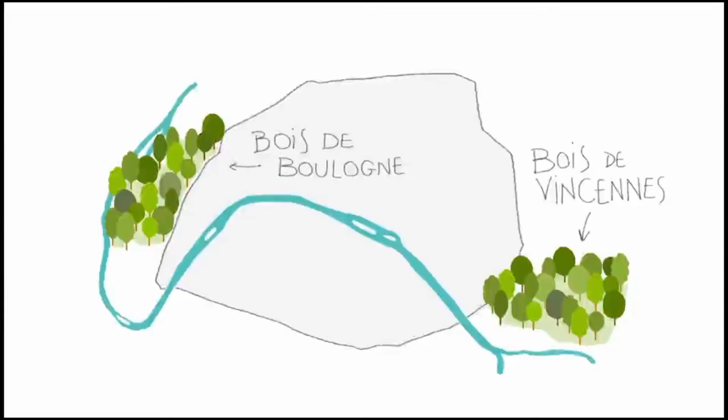The granite columns are still there. Walk through certain districts of Paris, and you will notice them: thick stone pillars, sometimes integrated into building facades, sometimes standing alone in courtyards. They are typically 1 meter in diameter, and they run vertically through multiple stories. Most passers-by assume they are structural elements or ventilation shafts.

They are neither. These are the remnants of a compressed air distribution system that powered factories, workshops, and machinery across Paris for over a century, a pneumatic grid that once rivaled electricity in its reach and sophistication. The Compagnie Parisienne de l'Air Comprimé began operations in 1881, and at its height, the system delivered compressed air through 186 kilometers of underground mains to thousands of subscribers. The infrastructure was not fully decommissioned until 1994, but the physical evidence, the columns, the valve housings, and the receiver tanks, remains embedded in the city's architecture.

It is a fossilized energy network that most people no longer recognize for what it is. The system was not experimental, it was profitable, commercial infrastructure that operated continuously for 113 years, outlasting many technologies that seemed more promising at their introduction. The fact that this history has become essentially invisible within a single generation reveals something fundamental about how technical knowledge persists or disappears, regardless of a technology's actual scale or success during its operational lifetime.

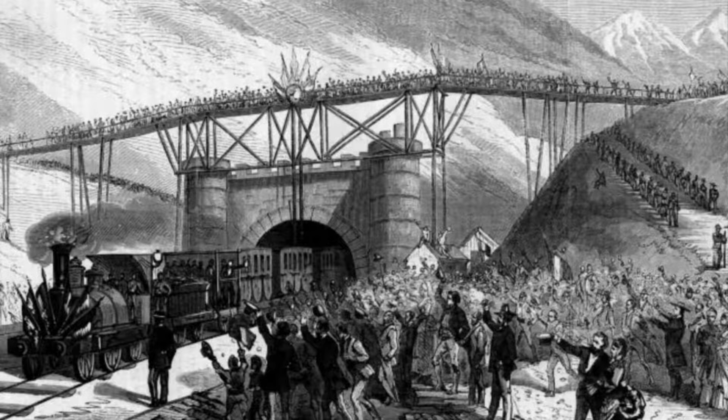The concept was not Parisian in origin. Compressed air as a power transmission medium emerged from mining operations in the Alps during the 1850s. The Mont-Cenis tunnel project connecting France and Italy through 13 kilometers of solid rock required drilling technology beyond what muscle power or steam engines positioned inside the tunnel could provide. Engineers developed water-driven compressors on the surface that forced air through iron pipes to pneumatic drills deep underground. The system worked. Drilling rates increased 7-fold compared to manual methods, and the tunnel was completed in 1871.

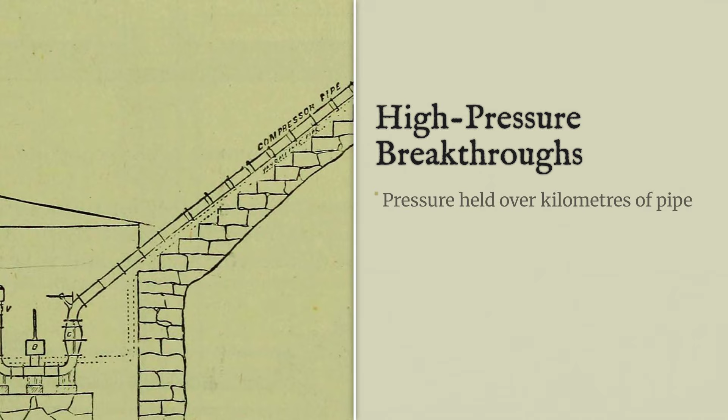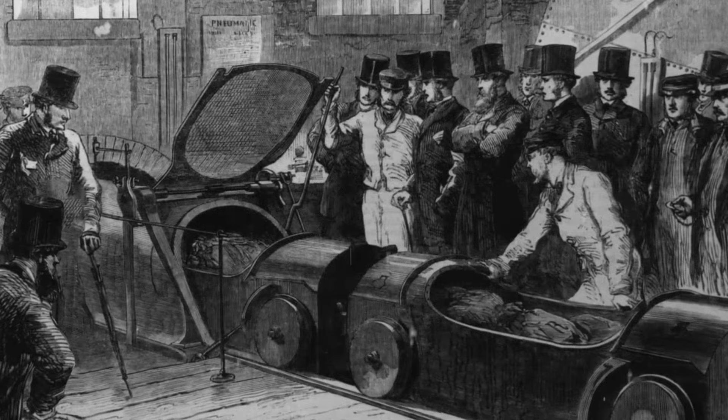What began as a solution to a specific excavation problem revealed a broader principle: compressed air could transmit power over distances and around corners in ways that mechanical shaft systems and even early electrical transmission could not match. The engineering challenges were substantial. They included maintaining pressure over kilometers of pipe, preventing condensation that would freeze tools in winter conditions, and designing valves that could withstand the constant cycling of high-pressure air.

But these challenges were solved through iterative design improvements documented in the technical literature of the period. The Revue Universelle des Mines published detailed accounts of the compressor installations, including specifications for the Sommeiller-Colladon compressors that powered the drilling equipment: water columns driving pistons with 600mm cylinders producing air at 7 atmospheres and capable of supplying 12 pneumatic drills simultaneously operating at depths up to 1,000 meters from the compressor station.

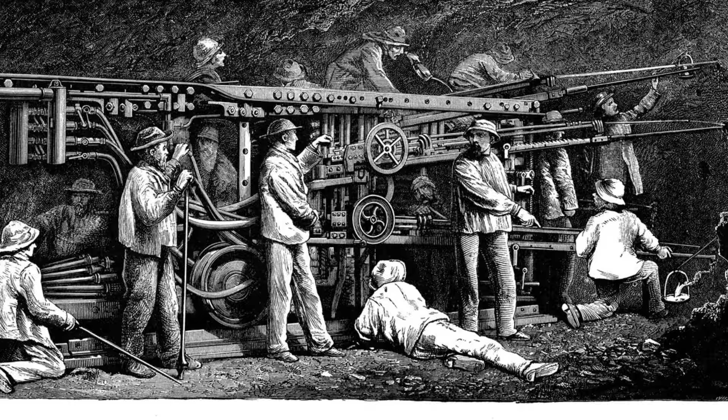Victor Popp saw the urban application. An engineer trained in Budapest and Vienna, Popp had worked on various pneumatic systems before arriving in Paris in the late 1870s. His insight was not technical innovation but infrastructural vision, recognizing that the same principles proven in alpine tunnels could serve urban workshops and factories.

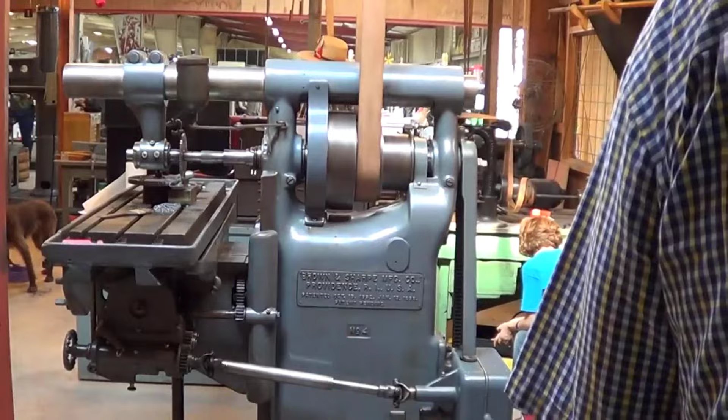Paris in 1880 was a city of distributed small-scale manufacturing. The Haussmann renovations had created wide boulevards and modern sewers, but most production remained in small workshops scattered throughout residential districts. These operations needed mechanical power for lathes, presses, saws, and textile machinery, but could not efficiently install individual steam engines. A single steam boiler in a small workshop created fire risk, required constant attention, and operated inefficiently at small scale. Gas engines existed but were expensive, temperamental, and likewise posed explosion risks.

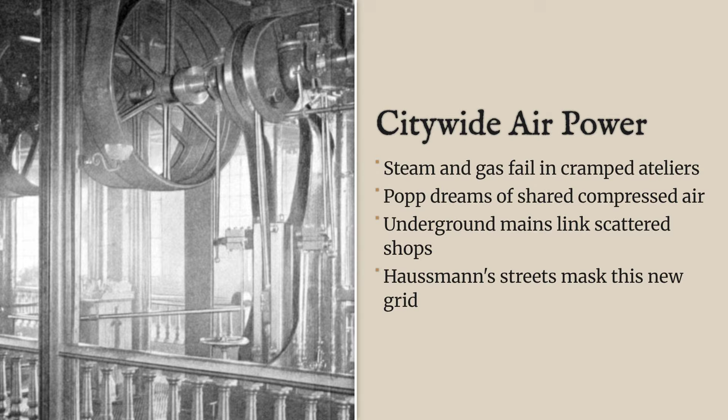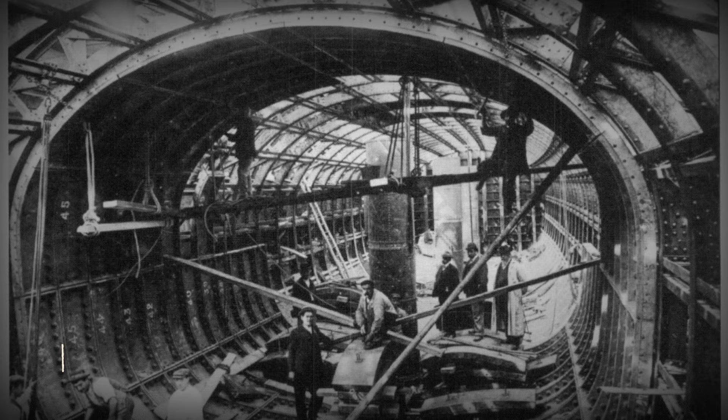Popp's proposal was straightforward: build central compressor stations, distribute compressed air through underground pipes like water or gas, meter consumption, and charge by volume. The Compagnie Parisienne de l'Air Comprimé received its operating concession in 1878 and began construction of its first station at Quai de la Râpée in 1880. It was strategically located along the Seine, where cooling water was abundant and coal delivery by river barge was economical.

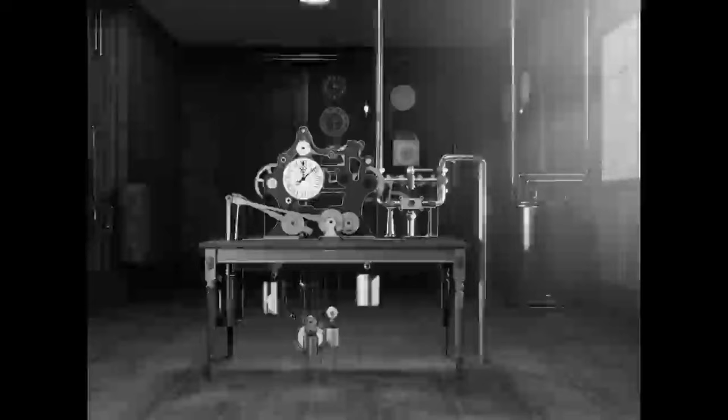The technical specifications are not ambiguous. Patent records from the 1880s detail the system's design with precision. The main compressors at Quai de la Râpée were compound steam engines, each with a low-pressure cylinder 1,100 mm in diameter and a high-pressure cylinder 650 mm in diameter, driving air compressors with cylinders measuring 800 mm in diameter and a stroke of 1,200 mm. These machines operated at 60 revolutions per minute, producing approximately 32 cubic meters of free air per minute per unit, compressed to 6 bar.

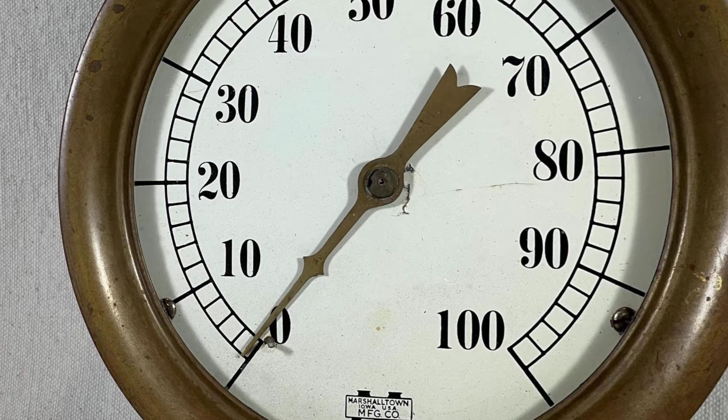The distribution network used cast iron mains ranging from 50 mm to 500 mm in diameter, buried at depths between 1.5 and 3 meters below street level, following the sewers and utility corridors that Haussmann's renovation had established.

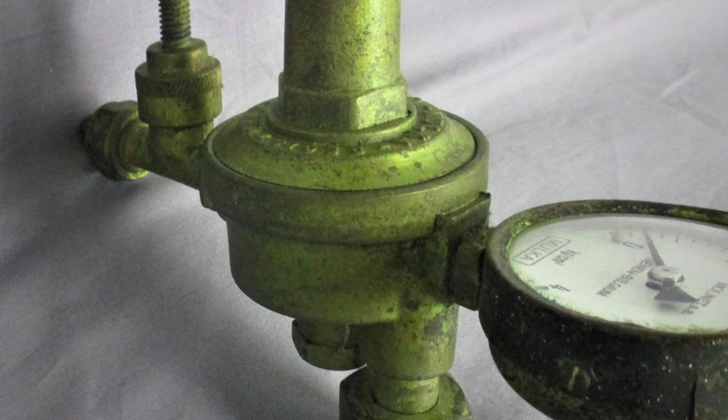Subscriber connections branched from these mains through smaller diameter pipes, terminating in the vertical columns that ran up building facades to individual workshops and factories.

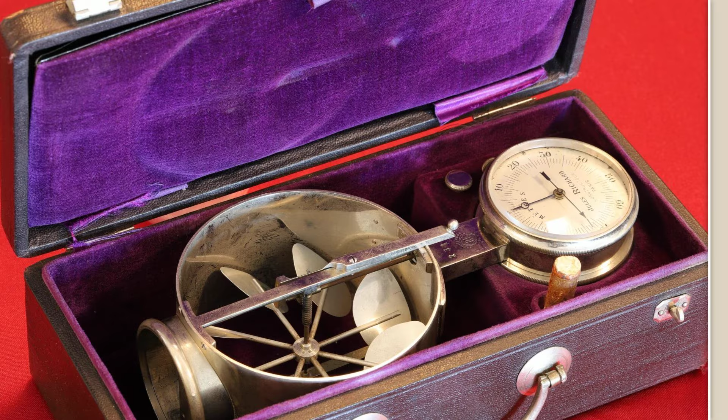Each connection point included a pressure regulator and a volumetric meter. The company charged by the cubic meter of air consumed, measured at atmospheric pressure, with rates varying by time of day and subscriber class. Metering technology was sophisticated, with rotating vane meters and mechanical counters, sealed units that required breaking a lead seal for inspection, the same principle later adapted for natural gas distribution.

The meters were manufactured by Elster, a German company that became a major supplier of utility metering equipment across Europe, and examples of these specific pneumatic meters survive in museum collections, including the Deutsches Museum in Munich and the Science Museum in London. The diversity of applications was remarkable.

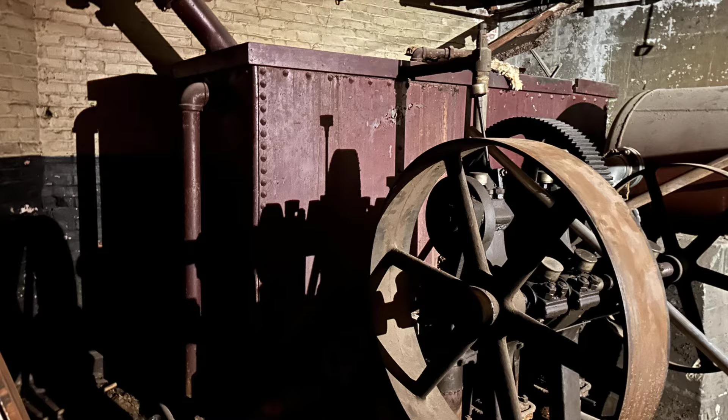The Bon Marché department store used compressed air to power its freight elevators, large pneumatic cylinders, some over 1 meter in diameter, lifting platforms through multiple floors without the electrical infrastructure that would later become standard. The system was inherently safe for retail environments because air leaks created noise but not fire risk, a significant consideration in an era when electrical systems were still prone to arcing and insulation failures.

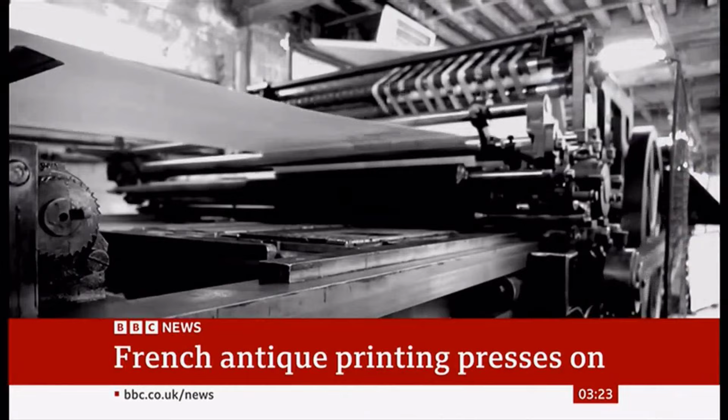Printing operations across the city used pneumatic motors to drive rotary presses, particularly for newspaper production where constant speed operation was essential for consistent ink distribution and paper feed. The Imprimerie Nationale, France's state printing house, had documented installations of pneumatic motors rated at 50 horsepower, connected directly to the city system and operating continuously during production runs.

Clock synchronization extended beyond decorative timepieces. The pneumatic pulse system coordinated time displays at railway stations, government offices, and commercial buildings across Paris, all receiving minute, precise pulses from a master clock at the compressed air company headquarters.

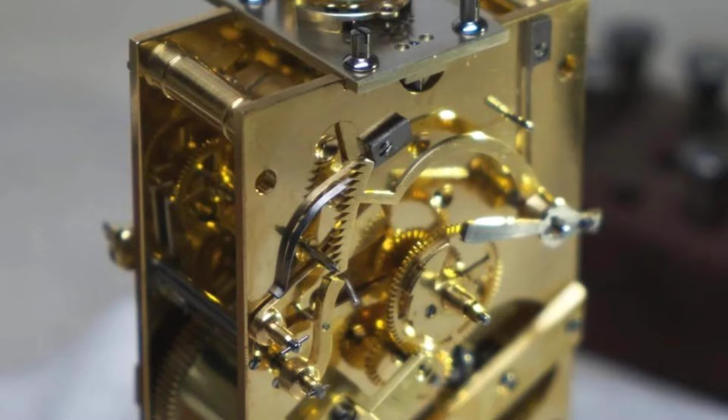This was not primitive technology. The pulse distribution system required pressure-sensitive valves that could distinguish between regular synchronization pulses and pressure fluctuations from industrial loads elsewhere on the network. Engineers solved this problem through carefully calibrated regulator design, documented in contemporary engineering journals, specifically the Annales des Mines volumes from 1889 to 1892.

The clock system alone represented significant sophistication. Over 8,000 pneumatic clocks operated in Paris by 1900, all synchronized to better than 1 second accuracy, creating a distributed time standard that preceded radio time signals by decades.

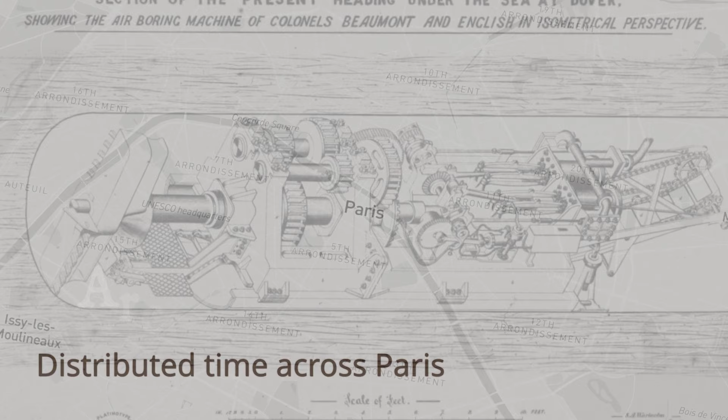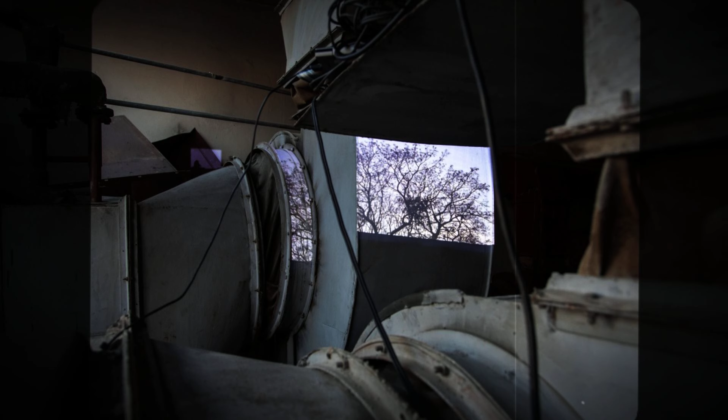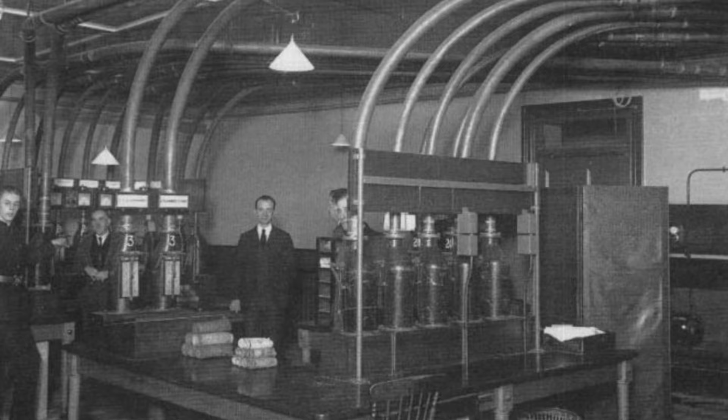The approach here is straightforward. Identify technologies that existed, functioned, and left physical traces, then examine why they disappeared from collective memory despite their demonstrated capability. This is not about conspiracy or suppressed invention. It is about the economic, technical, and social factors that determine which technologies persist and which fade, even when they worked exactly as designed. Pneumatic power distribution represents a particularly clear case, a system that operated successfully for a century,

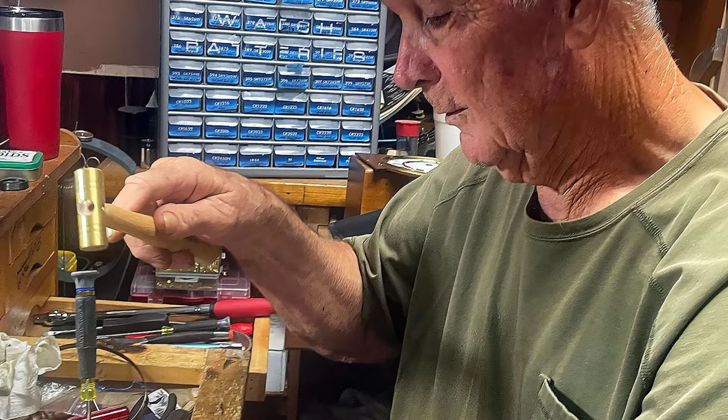whose infrastructure can still be located and examined, yet which has been almost entirely forgotten outside specialized engineering history. The documentation exists in accessible archives. The physical evidence remains visible in multiple cities. What disappeared was the living knowledge of people who understood these systems as everyday infrastructure rather than historical curiosities.

Other cities replicated the model with local variations. Birmingham, England operated a compressed air system from 1890 onward, with a central plant in the jewellery quarter powering workshops that produced small metal components such as watch parts, decorative metalwork, and precision instruments. The system there used higher pressure than Paris, operating at 8 atmospheres, and it used smaller diameter distribution mains reflecting the denser urban layout and shorter transmission distances.

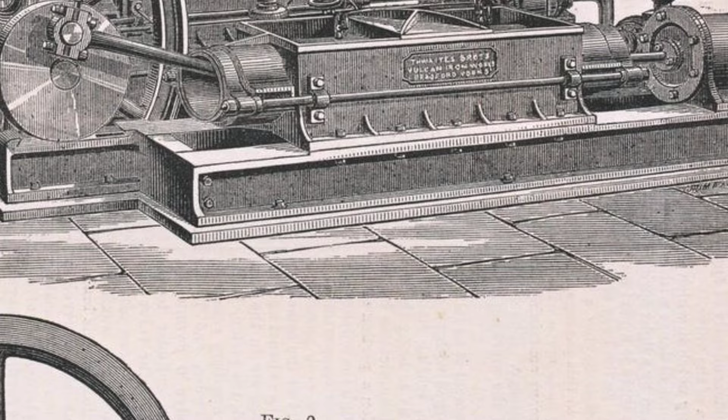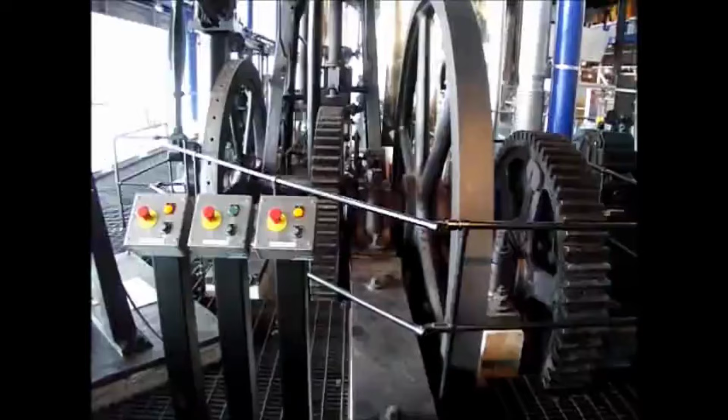The Birmingham system was particularly well documented because it served a concentrated industrial district where the economics were exceptionally favourable. Hundreds of small workshops within a few square kilometres, all requiring modest amounts of intermittent power, exactly the application where distributed small engines were most inefficient and centralized power distribution most advantageous. The Birmingham Daily Post published detailed accounts of the system's installation in 1890, including cost comparisons showing that pneumatic power cost subscribers approximately 30% less than operating individual gas engines for equivalent work.

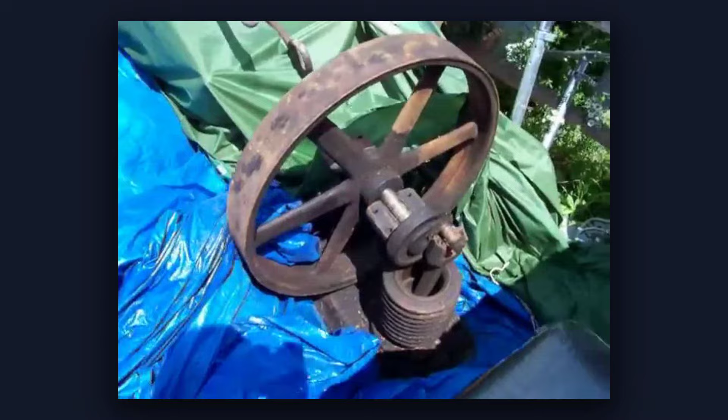Buenos Aires installed a compressed air network in 1896, primarily for industrial subscribers in the Port District, with compressors driven by imported British steam engines and a distribution system that extended roughly 30 kilometers at peak operation. The Buenos Aires system is particularly interesting because it operated in a climate with minimal freezing risk, eliminating one of the major technical challenges that plagued European systems: condensation management.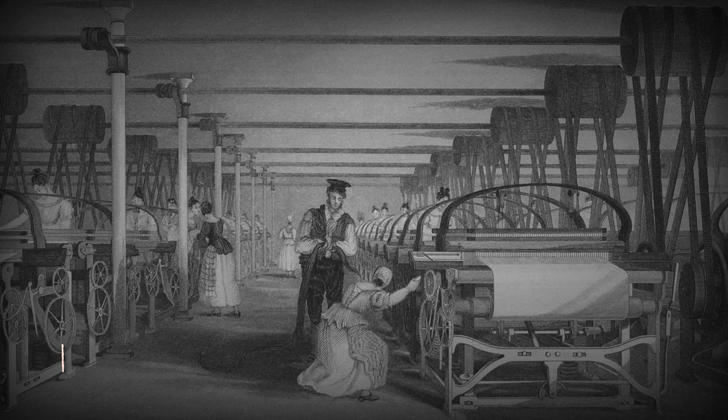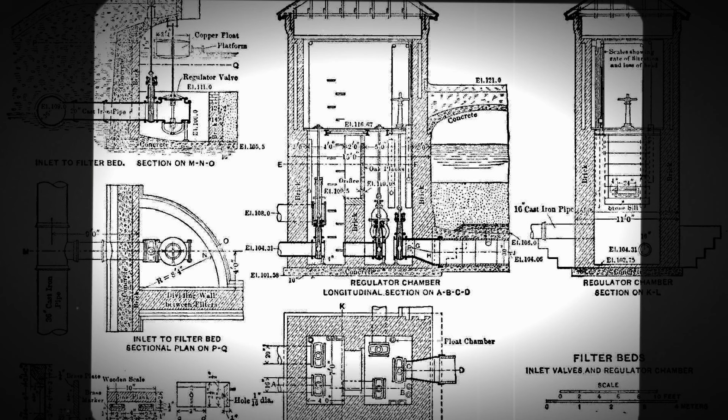Dresden's system, established in 1888, powered machinery in the city's textile mills and served the Hoftheater for stage machinery operation, with pneumatic winches and curtain mechanisms that provided reliable, controllable power for theatrical productions. Victor Popp himself consulted on several of these installations, and technical journals from the period, including Engineering, The Engineer, and Zeitschrift des Vereins Deutscher Ingenieure, contain detailed descriptions of these systems with diagrams, performance data, and operational cost comparisons with alternative power sources. These were not experimental demonstrations, they were commercial utilities with subscriber bases, published rate schedules, maintenance records, and documented operational histories spanning decades.

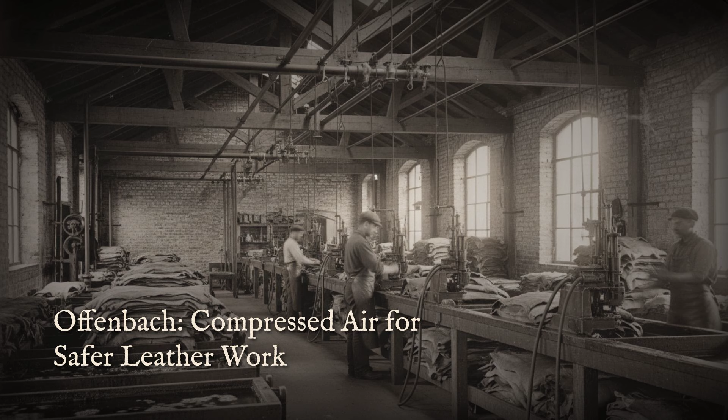The Offenbach system in Germany, established in 1891, served leatherworking factories and bookbinding operations, applications where electric motors were considered too risky due to the presence of flammable solvents and paper dust. The system there included a secondary network operating at reduced pressure, specifically for ventilation applications. Compressed air released through perforated pipes provided forced ventilation in workshops where natural airflow was insufficient. Mexico City established a limited compressed air system in 1890, primarily serving government printing operations and the National Mint, where the absence of spark risk was essential for operations involving explosive materials used in printing and metal processing.

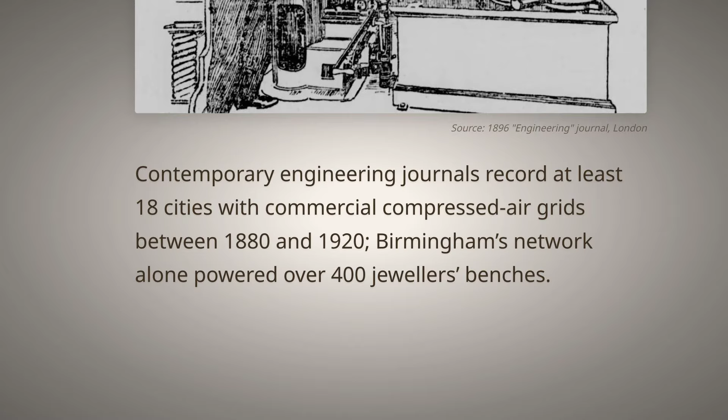The technical literature documents at least 18 cities that operated commercial compressed air distribution systems from 1880 to 1920, with combined distribution networks exceeding 800 kilometers of underground mains.

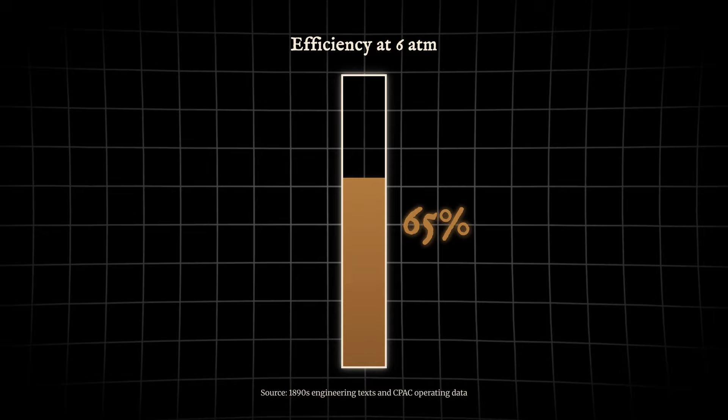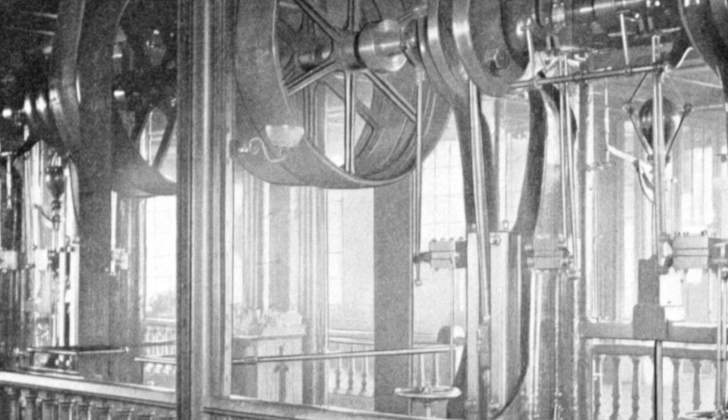The thermodynamic inefficiency was understood from the beginning and never hidden. Compressing air generates heat, significant heat that represents wasted energy unless captured and used. The theoretical maximum efficiency for isothermal compression at 6 atmospheres is approximately 65%, but practical systems achieved far less. The Paris compressors operated closer to 40 to 45% conversion efficiency from steam power to compressed air energy, with additional losses in transmission through the pipe network, estimated at 5 to 10% depending on distance and flow rates.

This meant that for every unit of coal burned to generate steam, only about 35 to 40% of the energy reached the subscriber's pneumatic motor. Early electrical systems of the same period operated at roughly 50 to 60% overall efficiency from coal to mechanical output at the point of use.

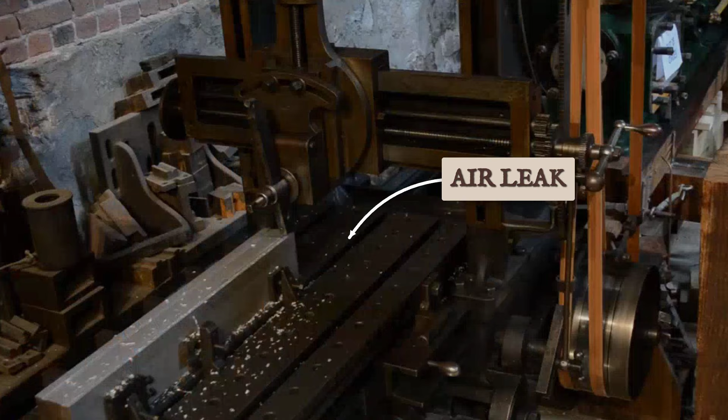The compressed air advocates didn't dispute these numbers. Their argument was that centralized compression allowed for more efficient use of fuel than distributed small steam engines or gas motors, that the infrastructure costs were lower than electrical distribution networks with no insulators, no copper conductors, and no transformer substations, and that the safety advantages in certain applications justified the efficiency penalty. For workshops handling flammable materials, for food processing operations where spark risk was unacceptable, and for applications requiring variable speed control in an era before practical electrical speed regulators, these arguments held weight.

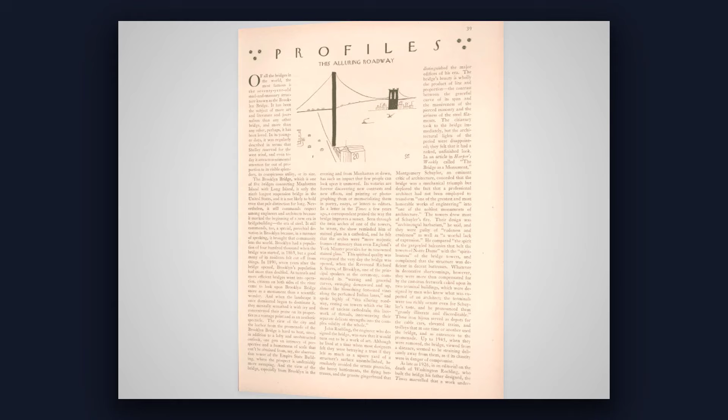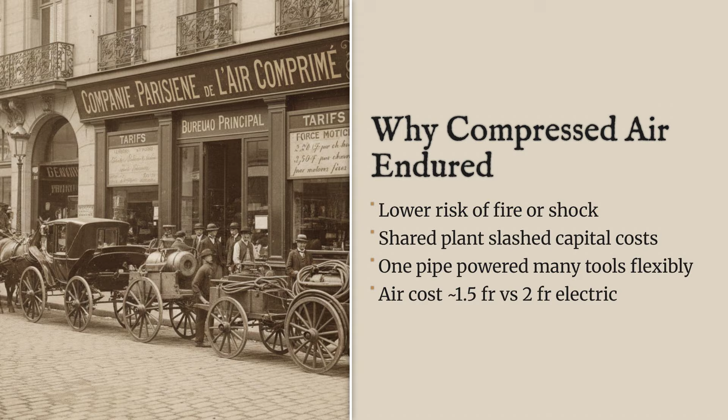Contemporary cost analyses published in engineering journals showed that in 1895, compressed air cost subscribers approximately 1.5 francs per horsepower hour in Paris, compared to 3.5 francs for equivalent mechanical output from small individual steam engines, and roughly 2 francs for electrical power where available, competitive enough to sustain a viable business model.

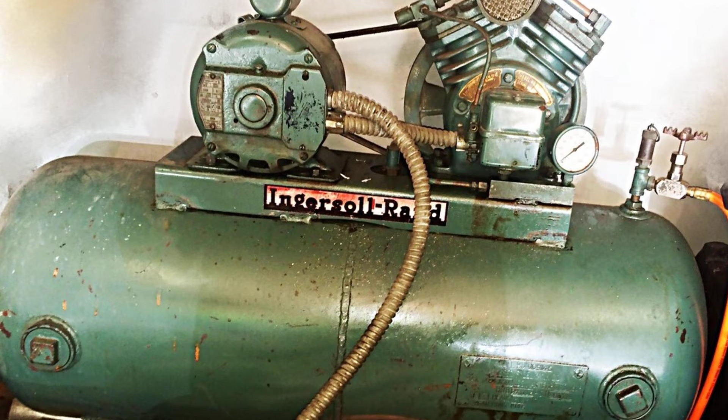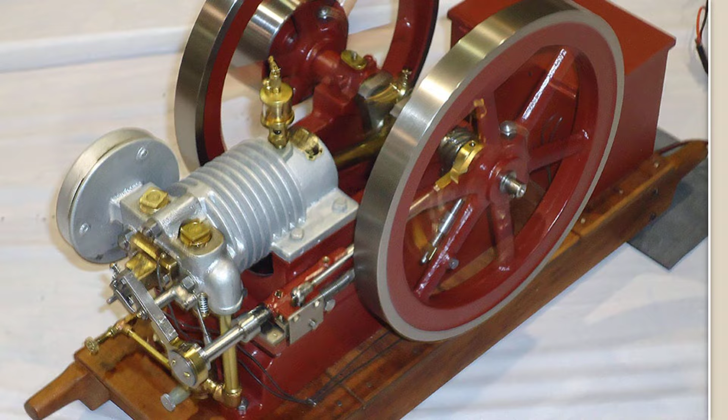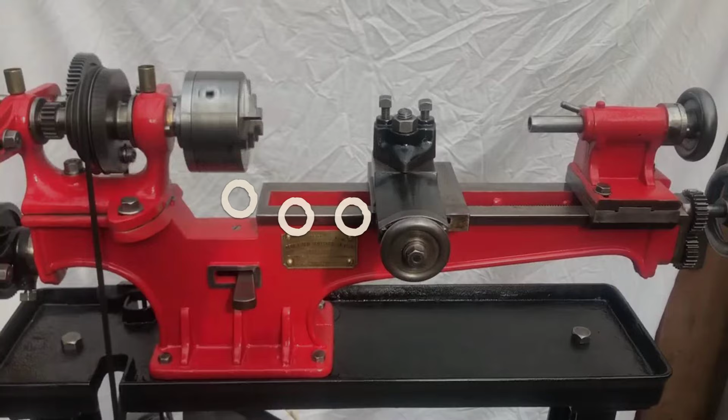The pneumatic motors themselves were engineering achievements often overlooked in the focus on distribution infrastructure. These were not simple piston engines, but sophisticated rotary devices designed for smooth operation and variable speed control. The most common type used rotating vanes sliding in eccentric cylinders, similar in principle to later rotary vane compressors, but operated in reverse. Patents from the period show remarkable sophistication, describing self-lubricating vane materials, pressure-balanced valve timing, and speed governors that maintained constant rotational velocity under varying loads. The French manufacturer Gans et Compagnie produced pneumatic motors ranging from fractional horsepower units for driving sewing machines and small tools up to 100 horsepower models for industrial machinery.

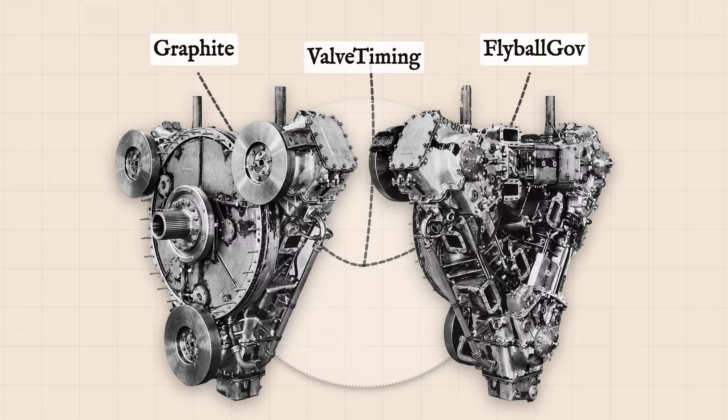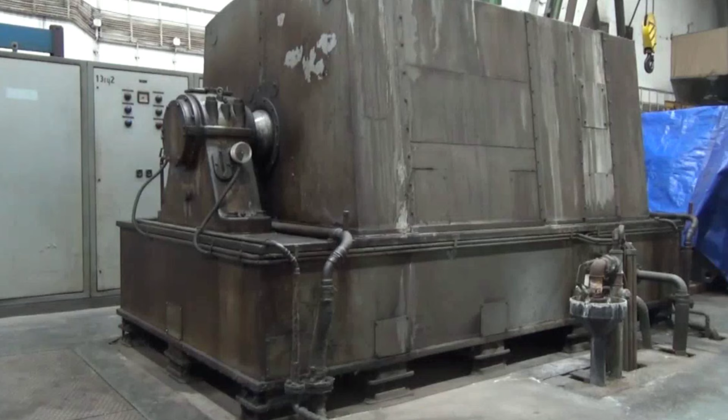These motors could be mounted directly to equipment without intervening belt drives. They could be started and stopped instantly without warm-up periods, and they provided smooth torque without the pulsation characteristic of single-cylinder steam engines. The speed control was achieved through simple throttle valves. By restricting the airflow, the motor slowed proportionally, a level of control that electrical motors could not match until the development of electronic variable frequency drives in the 1960s.

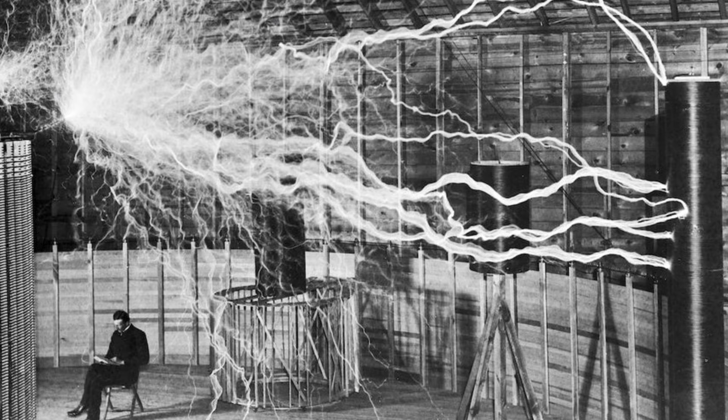Museum collections contain numerous examples of these motors, particularly the Musée des Arts et Métiers in Paris and the Powerhouse Museum in Sydney, which acquired several units from the compressed air system that briefly operated in that city during the 1890s. The decline was economic, not technical. Electrical power distribution improved dramatically between 1890 and 1920. Transformer technology matured, allowing high voltage transmission over long distances with manageable losses.

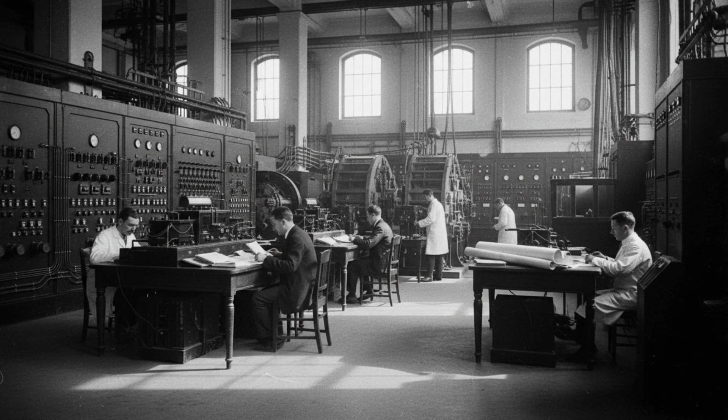Electric motor design advanced, particularly with the development of reliable DC motors for variable speed applications and the eventual dominance of AC induction motors for constant speed loads. By 1920, electrical systems could match compressed air's safety profile in most applications through improved insulation and circuit protection. More critically, electricity could serve lighting loads as well as mechanical power. A unified system for both applications proved more economically attractive than maintaining separate pneumatic and electrical infrastructure.

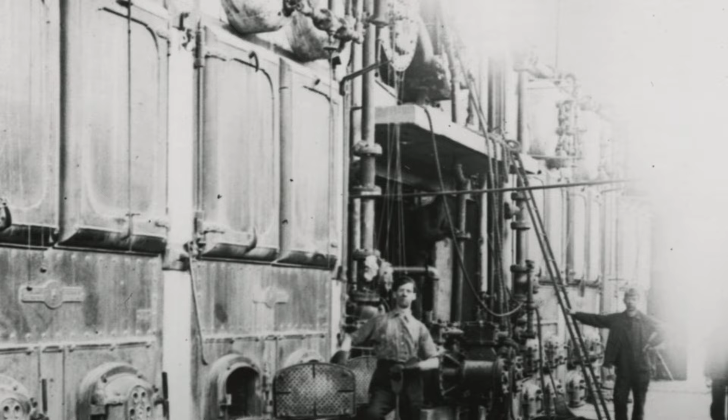The Paris Compressed Air Company never claimed superior efficiency. Their value proposition was safety, controllability, and avoiding the capital cost of distributed boilers or generators. As those advantages eroded, subscriber numbers declined. The company converted some of its distribution capacity to carry compressed air for pneumatic message tube systems, the pneumatic post network that moved small containers of documents through pipe networks in Paris and other major cities, but this represented a fraction of former industrial demand. By 1960, the subscriber base had contracted to a few hundred specialized users.

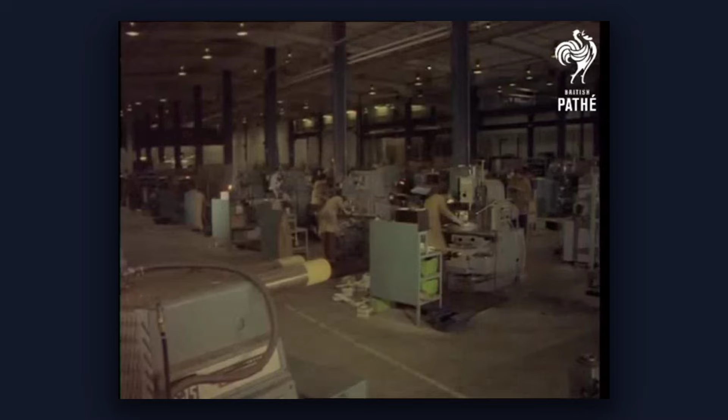The transition was not abrupt. The 1930s saw relatively stable subscriber numbers, and the system actually gained some users during World War II when electrical supply became unreliable. But the long-term trend was unmistakable, and by 1970, the remaining subscribers were primarily legacy users, with equipment too expensive to replace or specialized applications where compressed air retained specific advantages. The system lingered through inertia and the longevity of its infrastructure, finally shutting down in 1994 when the remaining contracts expired and maintenance costs for the aging pipe network exceeded revenue.

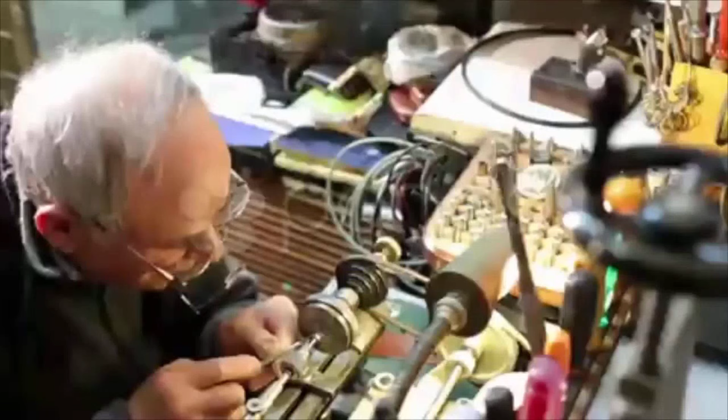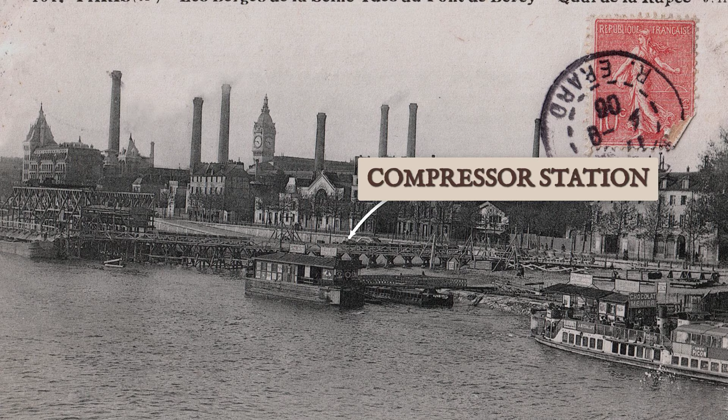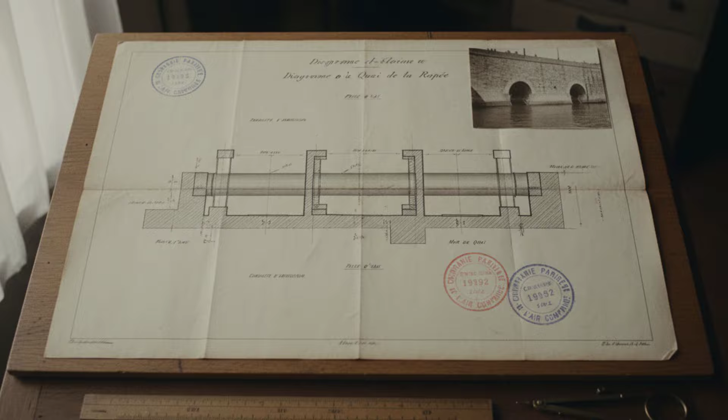The compressor station at Quai de la Rapée was demolished in 1998 to make way for riverside development, but photographs and architectural drawings preserved at the Archives de Paris document its layout in detail: a four-story building with ground-floor compressor halls, upper-floor offices, and a distinctive cylindrical tower that housed the master clock for the pneumatic time distribution system. The site now houses modern apartments with no indication of its former purpose, though the river wall retains enlarged sections that once accommodated the intake pipes for compressor cooling water.

The physical infrastructure outlasted the service because removal cost more than abandonment. The underground cast iron mains were buried beneath streets, sidewalks, and building foundations. Excavating them would require tearing up roadways, coordinating with other utilities, and disposing of thousands of tons of iron pipe. The simplest solution was to cap the system, drain any remaining condensate, and leave it in place.

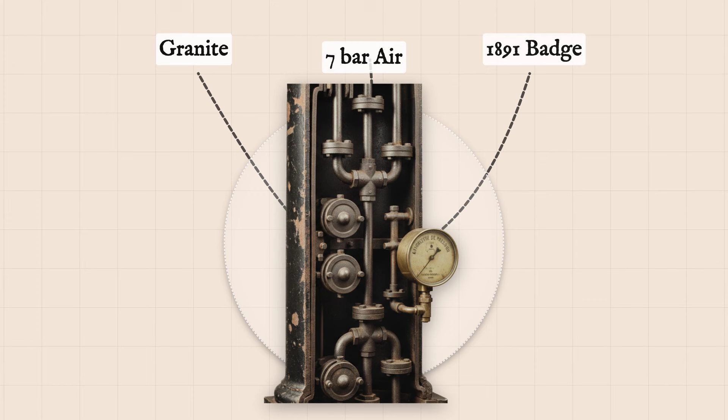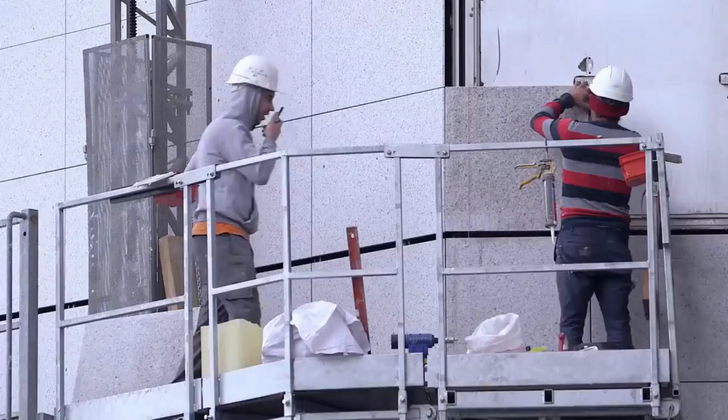The vertical columns posed a different problem. They were integrated into building structures, often passing through multiple floors, sometimes load-bearing or at least presumed to be load-bearing by subsequent building owners who had no records of their original purpose. Removing them would require structural analysis and potentially costly remediation. Most were simply left in place, sometimes cut off at ground level and capped, sometimes retained and repurposed as ventilation shafts, or simply as unexplained architectural features.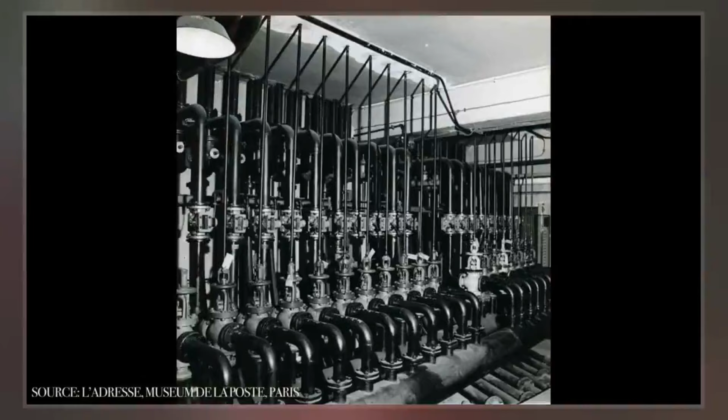You can identify them by their distinctive characteristics: unusually thick granite or cast iron columns, often positioned in building corners or against exterior walls, typically showing evidence of heavy-duty pipe fittings at their base, sometimes retaining fragments of brass valves or pressure gauges. The 9th arrondissement, particularly around Rue Lafayette and Boulevard Haussmann, has numerous examples. The 11th arrondissement, historically heavy with small manufacturing workshops, retains even more.

The building at 45 Rue de Turbigo shows a particularly clear example: a granite column approximately 1.2 meters in diameter, running from basement to 4th floor, with visible valve mounting brackets at ground level and a capped pipe terminus in the basement that once connected to the distribution main beneath the street. These are not hidden or destroyed, they are simply no longer recognized for what they are.

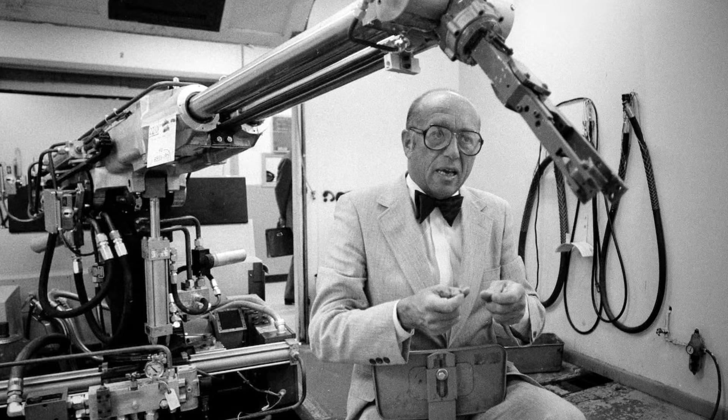The knowledge loss occurred within a single generation. Engineers who designed and maintained the pneumatic systems retired or died between 1950 and 1980. The technical literature documenting these systems remained available in specialized libraries, the Conservatoire National des Arts et Métiers in Paris, the Science Museum Library in London, and university engineering collections, but it ceased to be referenced in current engineering education.

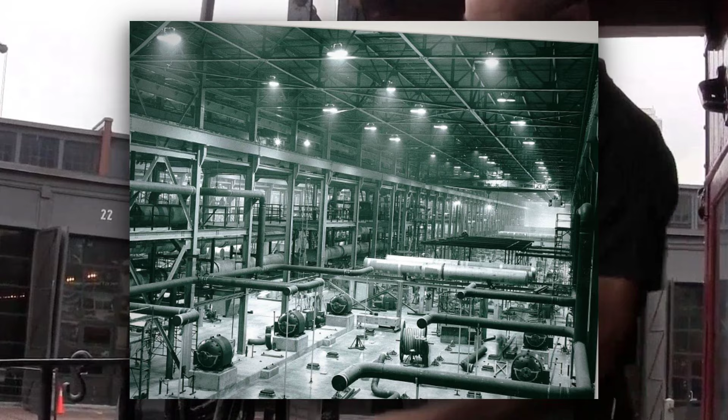Compressed air remained in use for specific applications, pneumatic tools in workshops, air brakes on trains and trucks, and control systems in process industries. But the idea of compressed air as a general power distribution medium, as urban infrastructure analogous to electricity or water, disappeared from engineering discourse. By 1990, most practicing engineers under the age of 50 had never encountered the concept, except perhaps as a historical footnote in textbooks about the development of electric power.

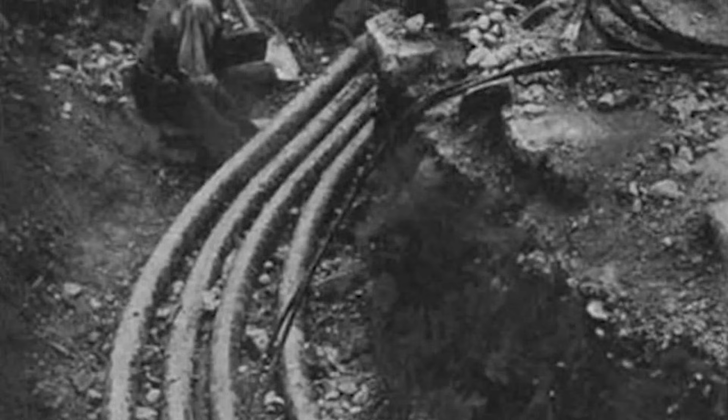The physical evidence remained visible, but the interpretive framework to understand it had vanished from common knowledge. This was not conspiracy or suppression. It was simple obsolescence combined with the normal turnover of technical expertise. Technologies that stopped being used, stopped being taught, and within decades, even recent history becomes obscure.

Textbooks document the transition. Textbooks from 1920 discuss compressed air distribution as current technology. Texts from 1950 mention it as recently obsolete. Texts from 1980 onward typically omit it entirely except in specialized historical surveys.

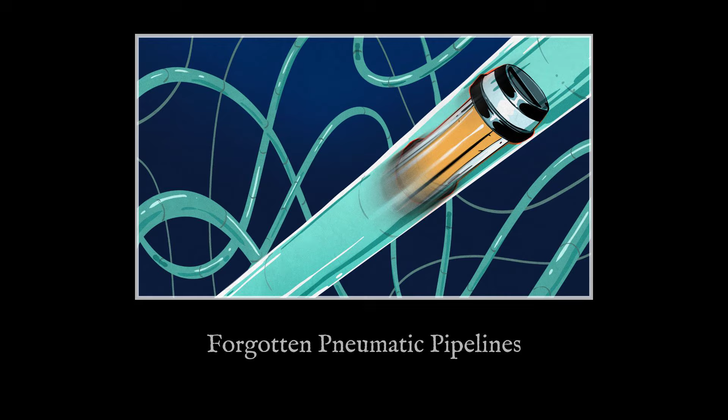Pneumatic message systems suffered a similar fate, but they left more obvious traces. Pneumatic post tubes operated in major cities across Europe and North America from the 1860s through the 1950s, moving small containers through pressurized pipe networks at speeds reaching 50 kilometers per hour.

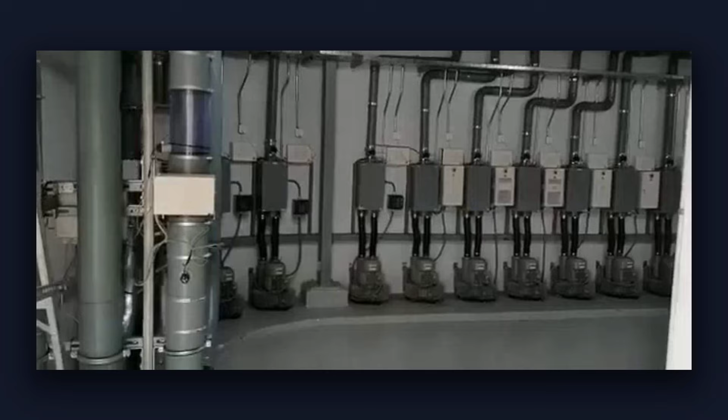Paris had the most extensive system, with over 450 kilometers of tubes connecting post offices, government ministries, newspaper offices, and the stock exchange. The tubes were typically 65 millimeters in diameter, running in separate networks from the power distribution system and using lower pressures, about 0.5 atmospheres, with direction controlled by valves at junction points.

The physical installation was similar to the power mains: underground conduits following street layouts, vertical risers in buildings, and terminal stations with pressure gauges and dispatch controls.

The New York system operated from 1897 to 1953, covering Manhattan with tubes that connected 23 post office stations, handling an estimated 95,000 messages daily at peak operation in the 1920s.

That New York system was particularly well engineered, with automatic sorting junctions that routed containers based on address codes stamped on their exterior—essentially mechanical packet switching decades before computer networks.

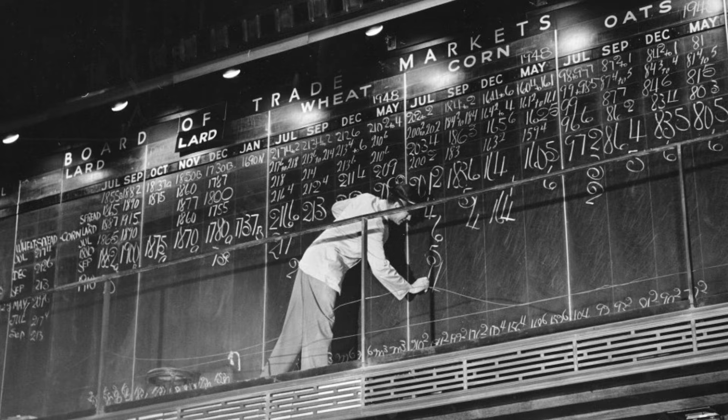London's system served the financial district and government offices with heavy usage connecting the stock exchange, the Bank of England, and major commodity exchanges, where rapid information transmission provided competitive advantage.

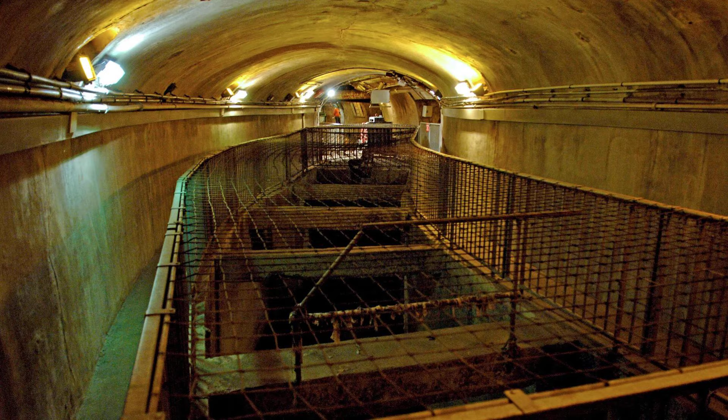Berlin's network connected military installations and government ministries, and portions of that system remained operational until 1976, serving East German government offices. Prague's system continued operating until 2002, one of the last survivors of what had once been standard urban infrastructure, finally closing when maintenance costs for the aging tube network became prohibitive and electronic communication eliminated any operational advantage.

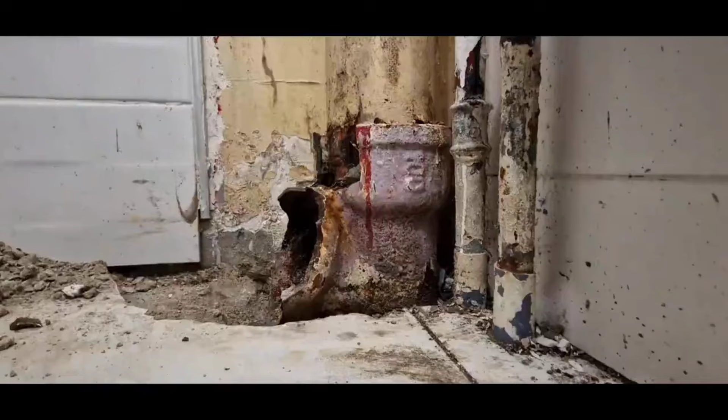When these systems closed, the tubes were typically abandoned in place for the same reasons as the power distribution mains—excavation cost exceeded salvage value. Building demolitions occasionally expose sections of brass tube junction valves and pneumatic cylinder mechanisms from dispatch stations.

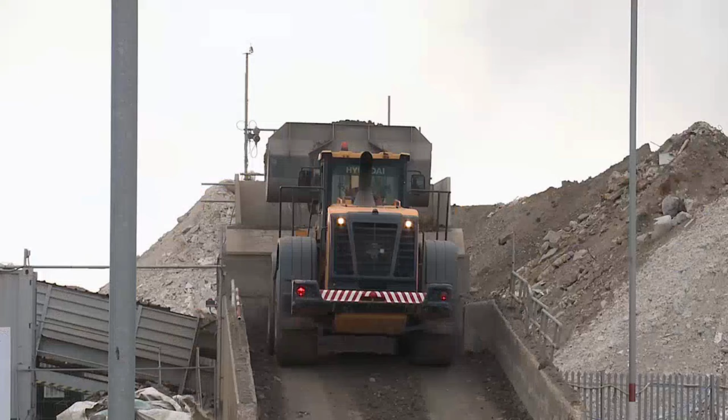Most people who encounter these artifacts have no reference framework to identify them. The Museum of London has a preserved section of pneumatic post tube excavated during Crossrail construction in 2015, complete with junction valve and direction indicators, displayed with minimal explanation because curators assumed viewers would recognize what they were looking at.

That was a reasonable assumption for objects that were operational urban infrastructure within living memory. Yet visitor surveys showed that less than 15% of museum visitors could identify the display's purpose without reading the accompanying text. Similar discoveries occur in other cities during utility work or building renovation.

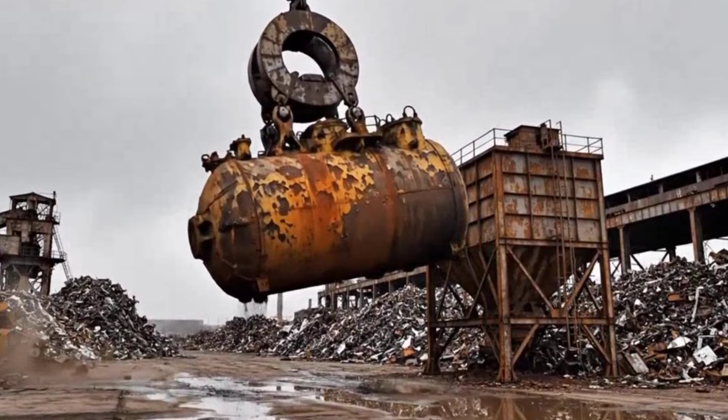Sections of tube network, dispatch station equipment, and compressed air infrastructure are often interpreted as generic pipe systems or simply discarded as unidentifiable debris. The lesson is not about lost superior technology—pneumatic power distribution was not superior to electricity by most metrics.

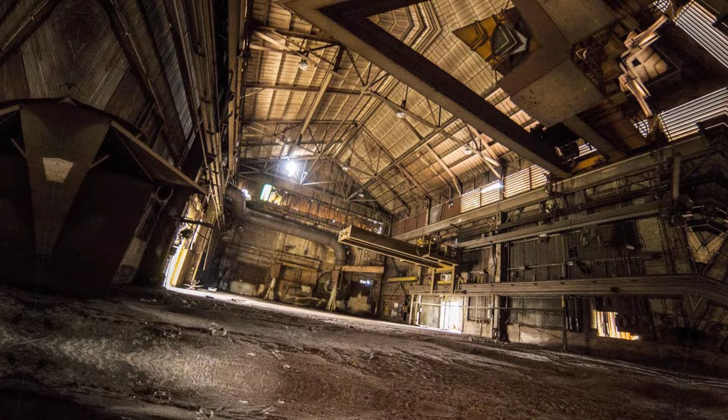The lesson is about the contingency of technological memory. We assume that important technologies remain known, that significant infrastructure leaves lasting recognition, that recent history is adequately documented. The reality is that operating knowledge is fragile. Documentation exists, but it requires active effort to maintain accessibility and interpretation.

The Paris compressed air system had thousands of subscribers in 1900, employed hundreds of workers, required significant capital investment, and operated successfully for a century. Within 30 years of its closure, most residents of Paris had no awareness it ever existed.

The physical evidence remains. You can walk to specific addresses and photograph the granite columns. You can consult archived maintenance records at the Archives de Paris. You can examine pneumatic motors in museum collections at the Musée des Arts et Métiers. None of this prevents the technology from becoming functionally invisible to contemporary awareness.

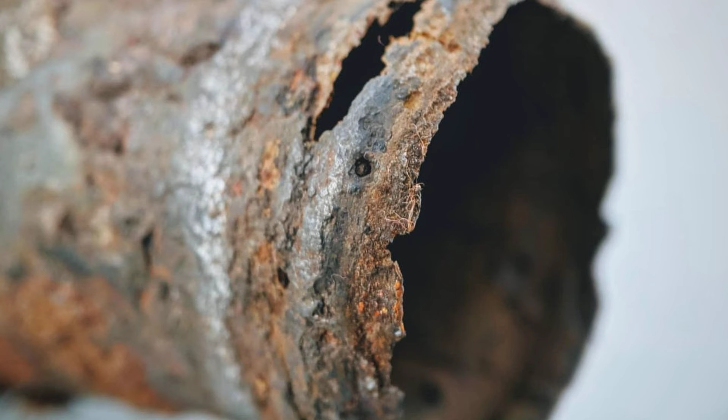This pattern repeats across industrial history. Systems that worked, that served real needs, that left substantial physical traces, can become obscure simply through the normal process of technological replacement and generational turnover.

The compressed air columns in Paris are not mysterious or controversial. They are just forgotten, preserved in plain sight, waiting for anyone curious enough to investigate what those unusually thick stone pillars actually represent.